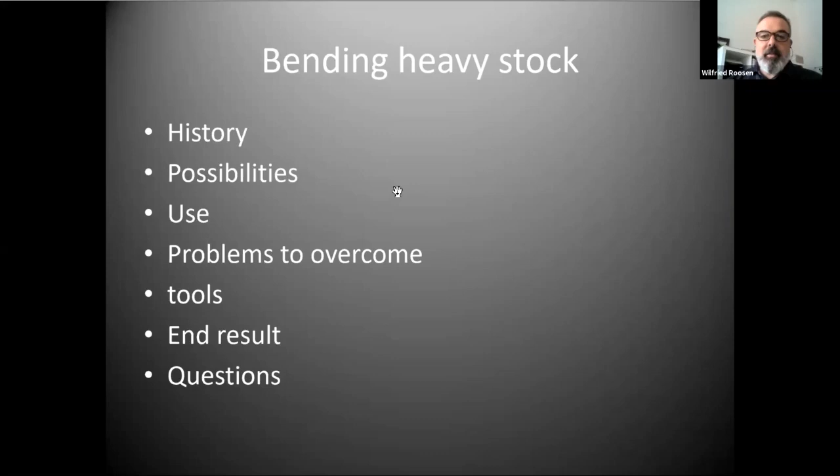So when we start at the history, what was the thing? I got a customer of mine, and he asked me to create a gate. He had seen it on the internet from a colleague blacksmith, and the picture here is the gate I made. But if you have the books of metal art, you will know there is a colleague of us who made this gate.

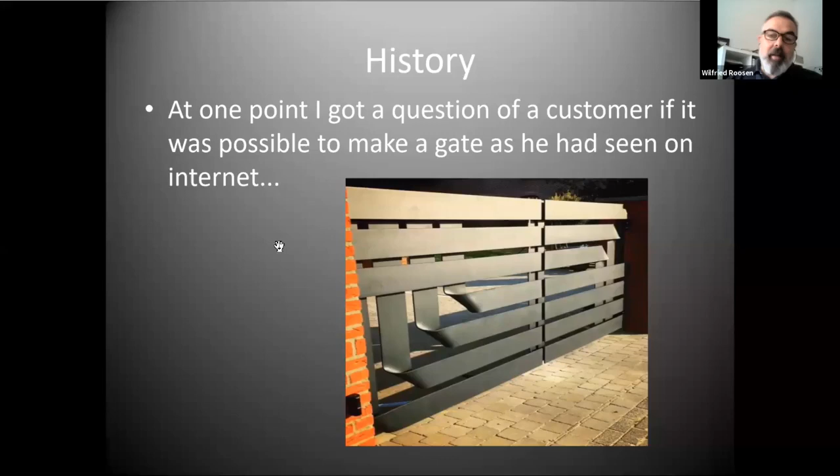So I thought, okay, good, I'll give him a call because I think it's the proper way. I asked him if it was okay for me to create a similar gate. Since we are like 900 kilometers from each other, he said it's okay, try to put your thing in it. So I got the okay to make it.

That was somehow awkward for me already, to ask a colleague if I could go a little bit his way. Then I thought, now I'm not going to ask how he made it - that was a little bit of a bridge too far. So I said, okay, that's the thing we will do here.

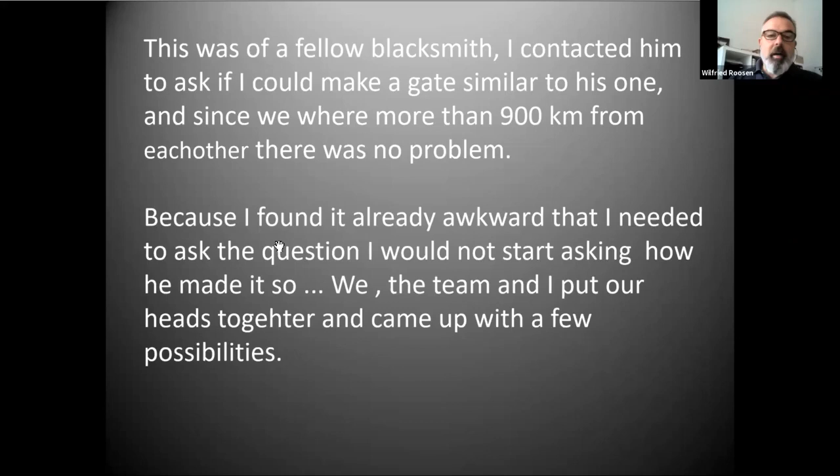We met the team and we talked together, we saw what the possibilities were and where our problems would be during the process of making. The first thing we needed to make was the bending of stock from 200 by 10 millimeters and plus minus 4,000 millimeters long - so 20 centimeters by 1 centimeter and 4 meters long.

Later on, I got a commission for a city here to make an artwork, and that was even bigger. It was bending of 400 millimeters wide by 10 millimeters thick, and the length was plus minus 2.6 meters high. So I needed to find a way to bend both those stocks, and it was necessary to bend at least 10 millimeters thick and up to a width of 400 millimeters.

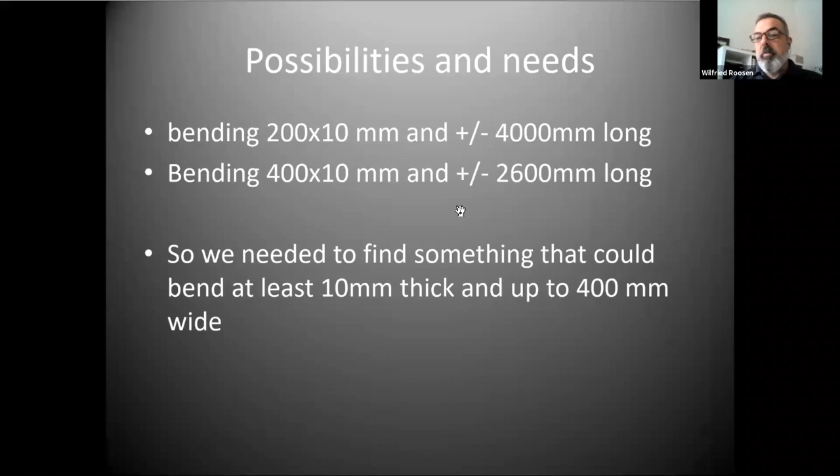Afterwards, you see you can use it to build stairs. Now I got a commission in a nearby city where we needed to build 4 stairs, and I will use the same technique to build the stairs. We made the handrails, we made the gate fences, and then we made art. As a matter of fact, you can use it for everything, as your mind, when you put your mind into it.

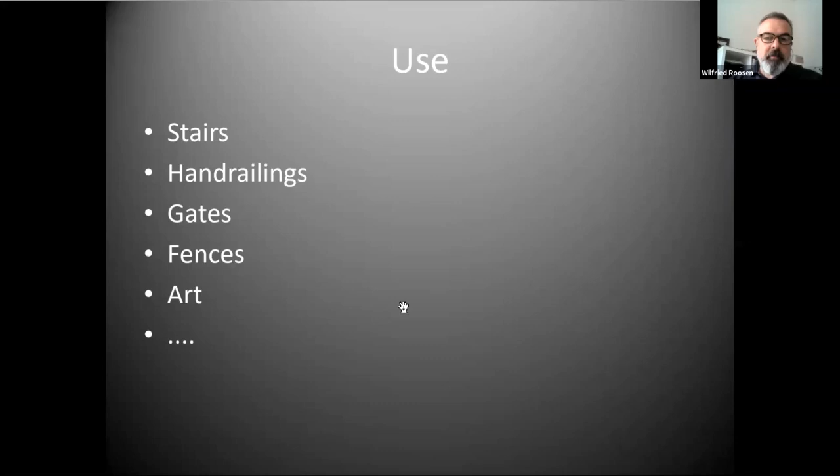So what were the problems that we needed to overcome? At first, it's the thickness of the material - 1 centimeter or 10 millimeters thick. It's the wideness of the material, at least 200 millimeters. It was the length of the material, and because of all those three above, it's of course the weight of the material became also a little problem.

Because we needed to go from the fire onto the tool we made. And then by bending it, since you made more than one piece, you should have equal bends on every piece. You will see, like when we created the gate, the angles or the square bends needed to be exactly the same as well, so in angle as in thickness. So that was important also.

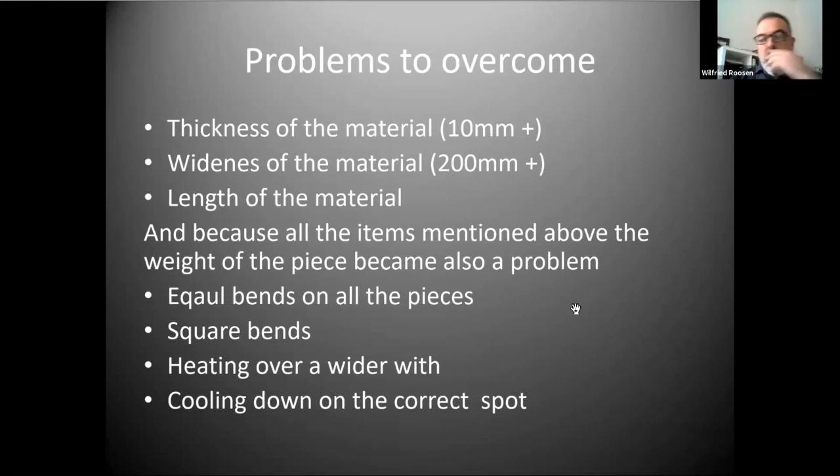Then heating over the wider width - so for 200 millimeters, it's okay, but for 400 millimeters, it's already something in the normal fire, because we have a normal fire here. And then we learned during the process that actually the cooling down on the correct spot is really important. So these were a bit the problems we wanted to overcome before we made it.

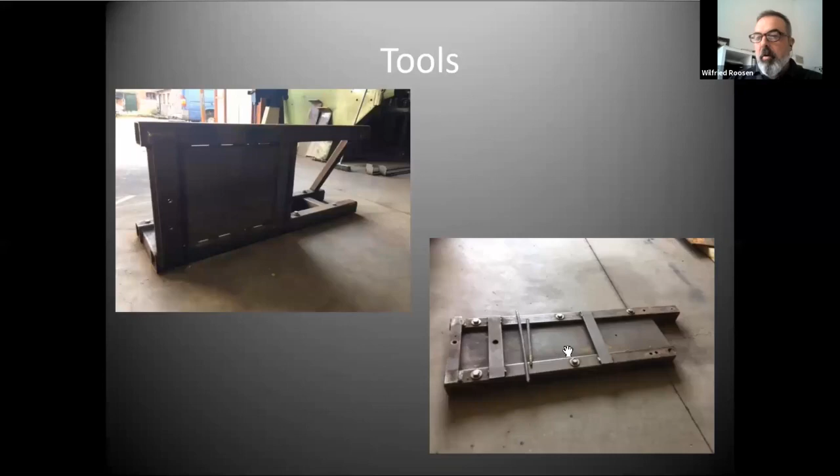So we made two tools - you see a vertical one here and a horizontal one here, which are both connected with the ground, with the floor of our forge, so we can use the power of the floor of our forge. The first thing we made was bending in a straight line the 200 by 10 millimeter stock. So therefore we created this tool, the same as for bending in an angle, which you will see later.

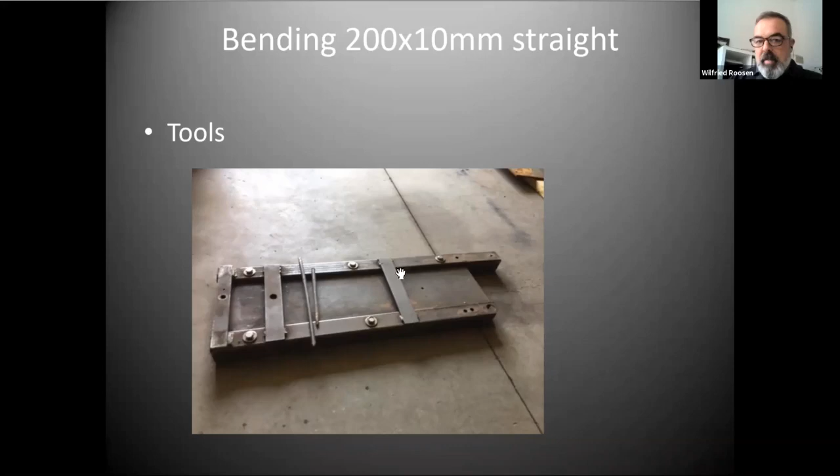So actually the plate here in the middle is the stock of 200 by 10, and we made it in such a way that you can put another stock inside it. It will go inside, so it comes out of the fire and it goes inside of here. This is how we bent it.

Normally this piece will be straight. It goes in, comes from the fire straight in here, we fix it here, and then we bend it upwards. Once you've started bending, there are two or three important things: that the material stays in place, that the bend is straight so you get a 90-degree angle, and that the angle stays at 90 degrees on all sides. That was a bit of the problem we faced when we bended the material.

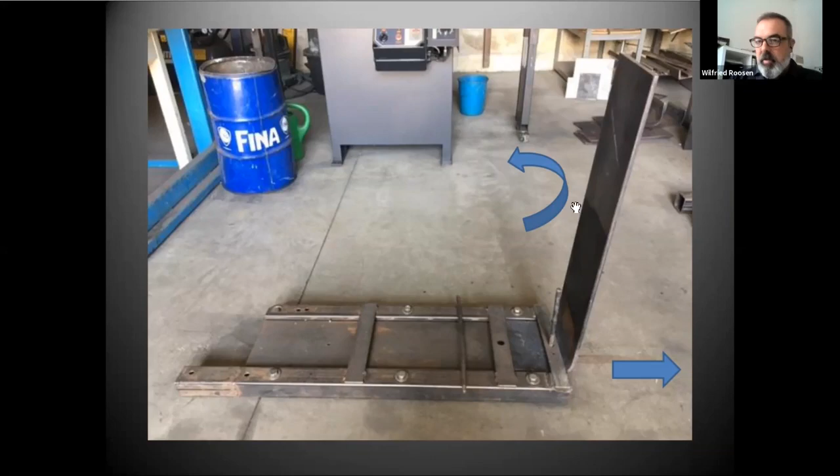So what did we do? Patrick suggested, and he was right, why didn't you make a stop so you didn't need to calculate every time how deep you needed to put the material in there? But I asked myself, okay, why didn't we do a normal stop, and why did we fix it in the hole instead?

That's because the first time when we bended it and put the iron inside, it came a little bit back out of the tool. So then we decided, okay, no, we will put it in there.

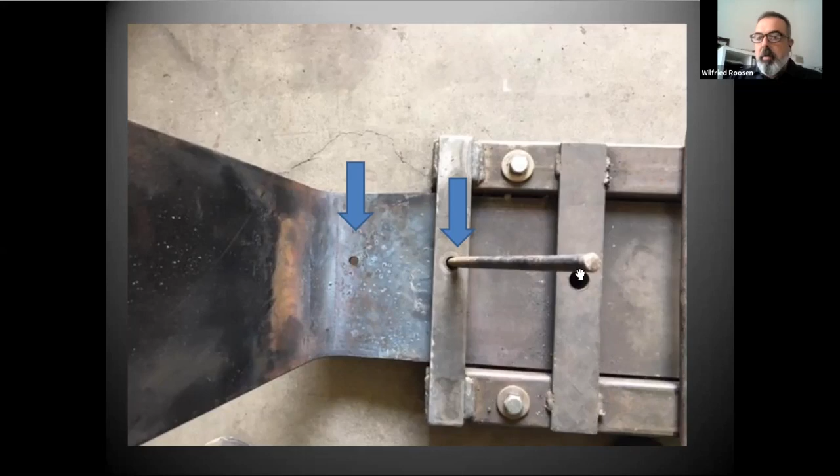We do the measuring, we drill the hole, and in a normal situation this piece of steel goes in this hole, and the stock will stay in place, and then you will bend it upwards.

For bending it upwards, we created this so it will bend at a straight angle throughout the total width, because you don't want to give it the wrong angle while bending. So we created this tool which will slide over the stock, and you bring this upwards, and then the stock will bend also upwards.

So that's the thing - important is the cooling down of your stock. This part, on the right side of the first angle, the first arrow, will go into the device, so that's no problem, that can be hot, it's no problem.

The part on the left side is the thing to watch. When you bend smaller stock, if it's too hot until here, it won't bend right where you want it to, but it will also bend here, and you won't have the right corner, of course. So that's a little bit about bending in a straight angle.

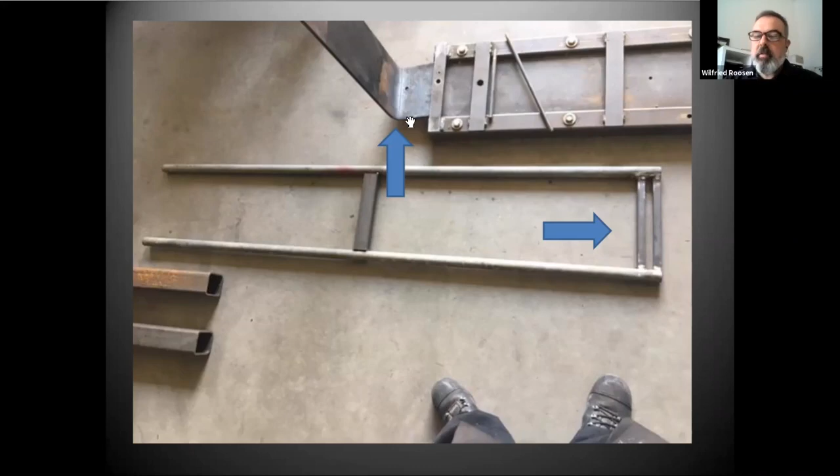That's what we use now together with the gate to make a fence. The stocks are in the paint shop right now, so I can't show you at this moment, but I will show you the end result later, and I'll send a picture to Patrick.

So then we moved on to bending the 200 by 10 millimeters at an angle. We started from our initial device or tool, and we needed to bend it at an angle of 45 degrees, plus the height needed to be the same every time.

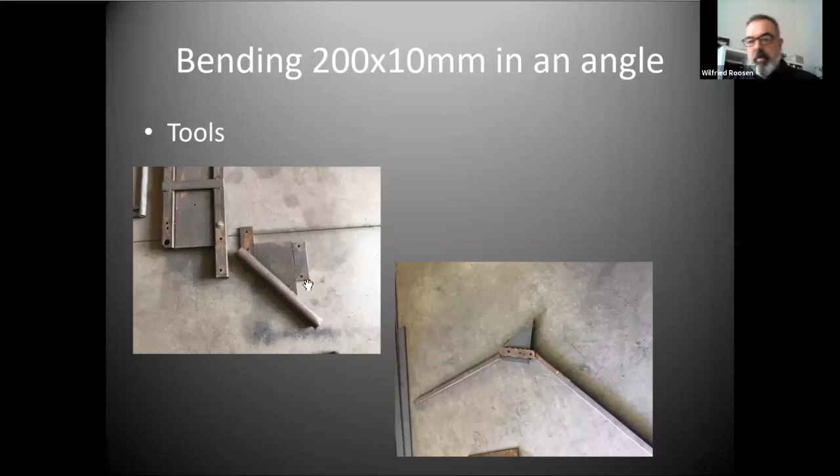In between the two stocks, when you bend them, you need to have a certain height. So we took a bar of 6 centimeters, 60 millimeters high, so that we always had a bend of 6 centimeters. So what we did was - I'm speaking here about these bends.

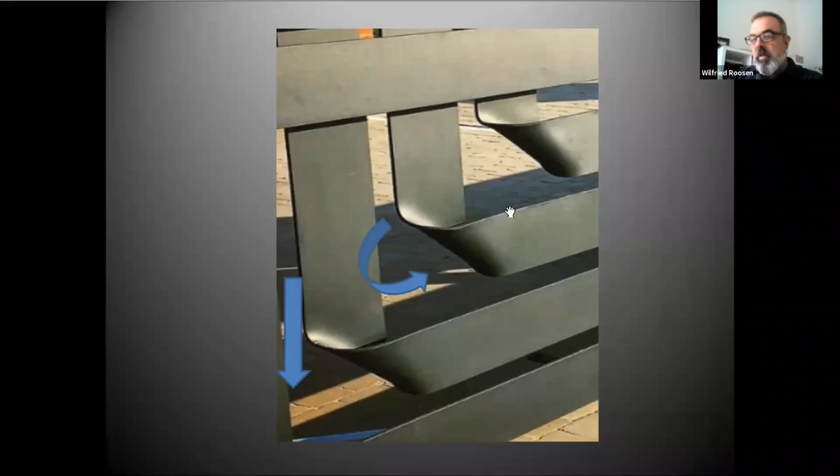You see the stock normally goes straight down, so you don't just need to bend it 90 degrees upwards, but you also need to put it at 45 degrees in an angle. The space here needed to be the same as on the other stocks. So that was a bit of the challenge we had.

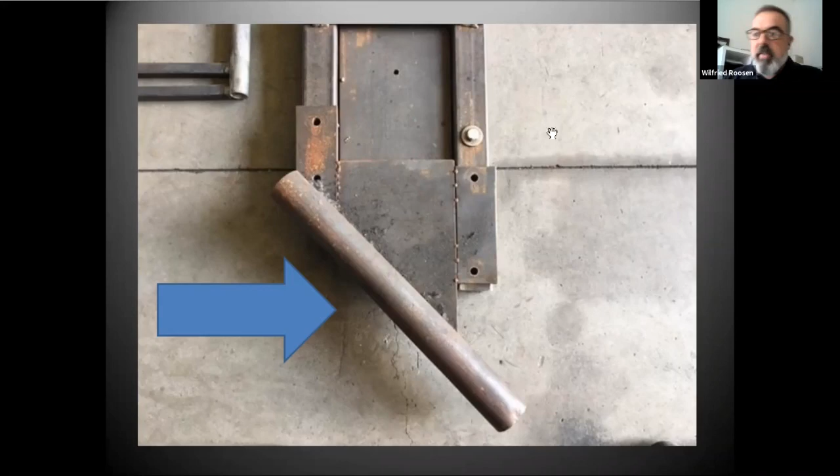So what did we do? We created this piece that we put on the initial device. The stock will slide underneath, and then you bend it upwards and to the right, and on the other side to the left. So you see here, this will be the space.

So what did we do? We took the thickness of the stock plus 3 millimeters, because when it comes out of the forge it's a little bit thicker, so it needs to go smoothly into the device.

Plus, because it was 2 meters plus or minus on each side, you already have the stock bending as it comes out of the fire. So this needs to go quickly - you don't have like 3 minutes to bend it and straighten it, because once it's bent, you needed to control if the angle was 45 degrees and 6 centimeters high.

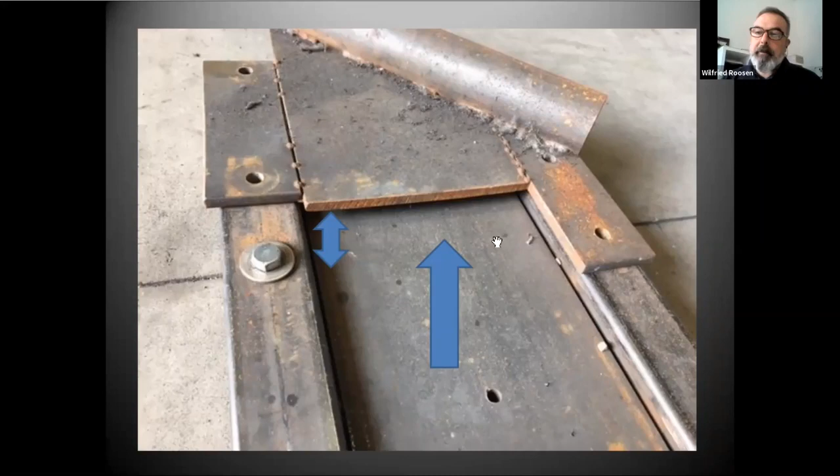So here you see, I took a little piece that we had, so it goes in here, and we bend it straight over this steel bar of 60 millimeters, so that we always have the same thing. Now, to do this bend, you want to have a clean bend here.

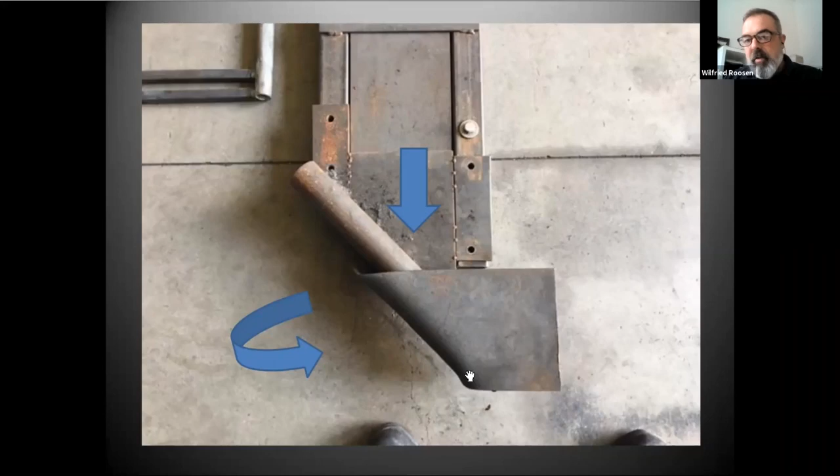When you do it by hand, the bend is never clean. So what did we do? We made this device like a guillotine, which has the 45 degree angle, and it goes over the device, and then with 2 guys you bend it and you turn it. This will be the bend here, and it will be controlled over the full length of your stock.

Here you see again the hole which lets the stock stay in its proper space. So here you see, this is the device we put on it, and this is then the end result of bending the stock.

So for the gate, you must know this goes like 2 meters wider on the right side, and this goes like 2 meters up. So that was a little bit the thing.

Then we got another commission from the city, and there we needed to bend 400 millimeters on 10 millimeters thickness, not 400 on 100. But we needed to make a chair, so this was bending left and bending right. So you couldn't make it on a horizontal tool like we used for the gate or for the fence.

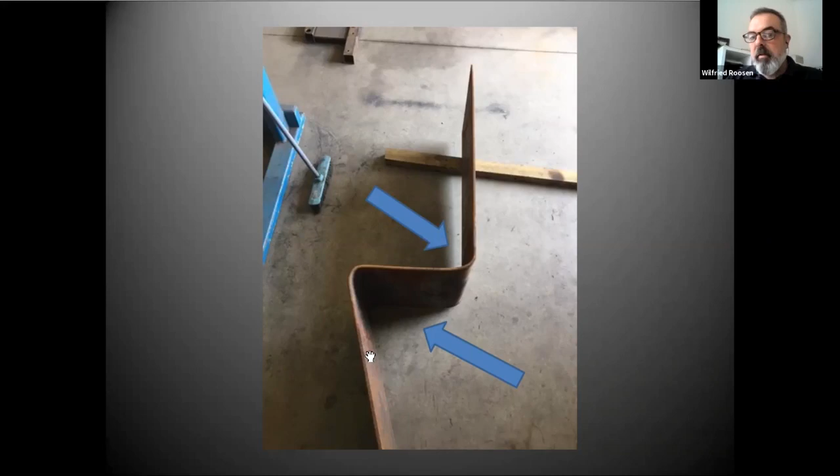So we said, okay, we're gonna use plus minus the same, but we will put it on a vertical stand. You can see here we got this bend, and then we get more than 45 degrees, of course bent, or 90 degrees bent down. Now when you put it on a horizontal tool like the one we started with, this will give a problem because you cannot bend this one. So we said, because you need to control it as well, we will bring it vertical, then we can control it.

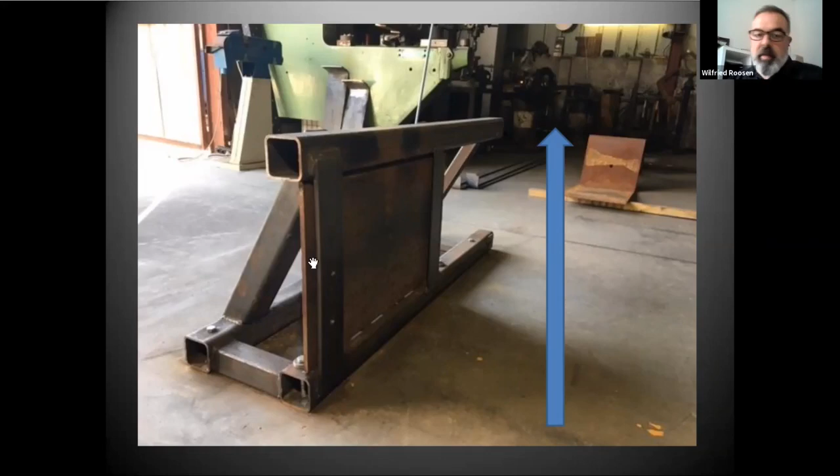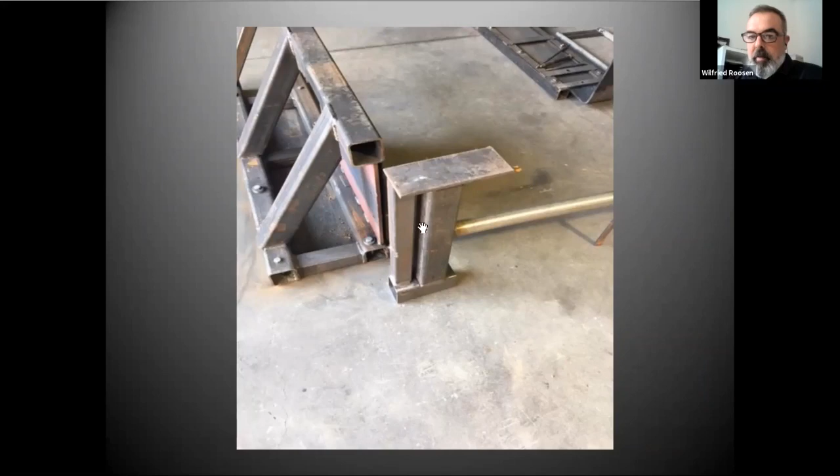So how do we do it then? This got the full length, it's got the same thickness as the material plus 3 or 4 millimeters, and we made this device as well. Why? The plate goes in here. We can control the bending because of this thing here.

Because when you try to bend it and you go up or down here, your bend will not be correct, so you won't have your correct angle at the end. So we needed to have something which stayed on the same level to start from. So we need to have this.

You see, this is 10 centimeters from the floor, so we needed to have at the end the same 10 centimeters from the floor. If not, this would go a little bit not straight again. So we made this device here, and here you get the measuring horizontal on the floor, and we go and we make the bend like that. So this is here the end result in bending.

So these were a little bit the problems during the stage that we faced. That was first of all bending over the full length, and then having a nice bend on the two articles. So normally here comes the other one, and he goes here and he stands like this.

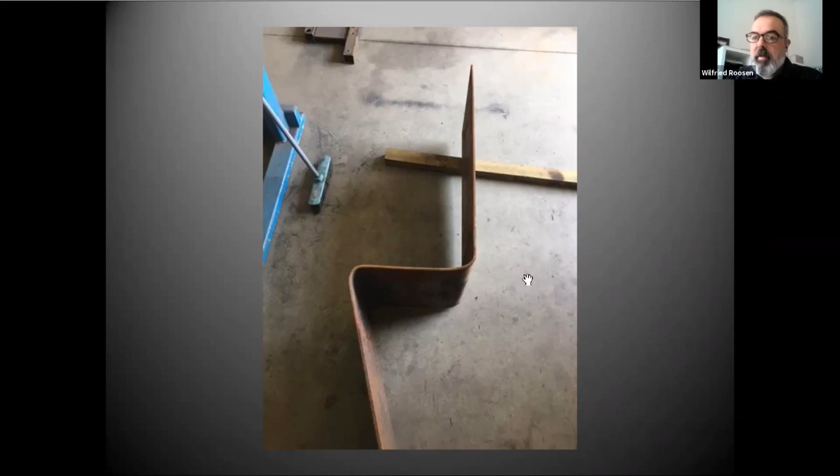It's a chair, which I will send a picture of because the community is placing them next week. So I don't have it anymore, but when it's ready, I will put a picture as well. Okay, so these are a little bit the end results.

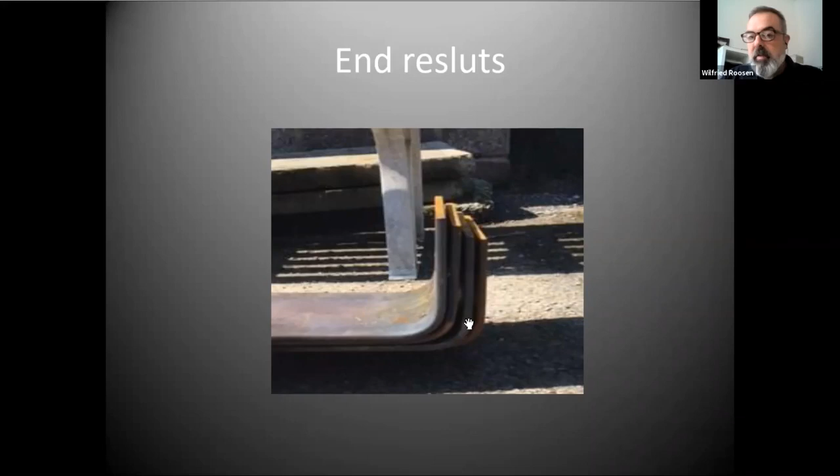So this is the bending of the material, of the straight material, and you see this was used, we made the fence out of this. This is one part of the chair, so the other chair is coming on the back end of it. This is the gate and the smaller door.

So you see we needed to make 1, 2, 3. Here you got 4, and here another 3. So we needed to make 10 bends who are equal. That was a little bit difficult.

That's another one. And then we had a commission in Hasselt, in a bigger city, and there we needed to make hand railings, so I actually used the same technique. Also here is the bending of the stock, the normal bend, and then when you see upstairs, we took this 45 degrees and we went down. So here you see it.

So we bend 45 degrees, and then we go down with the angle of the stairs. And here's the same, you got 90 degrees, and it goes like, I don't know, 30 meters or something straight on. So it's all not the traditional way of forging, but yeah, we try to take forging with us to build a new gate or a new handrail here, so that the people...

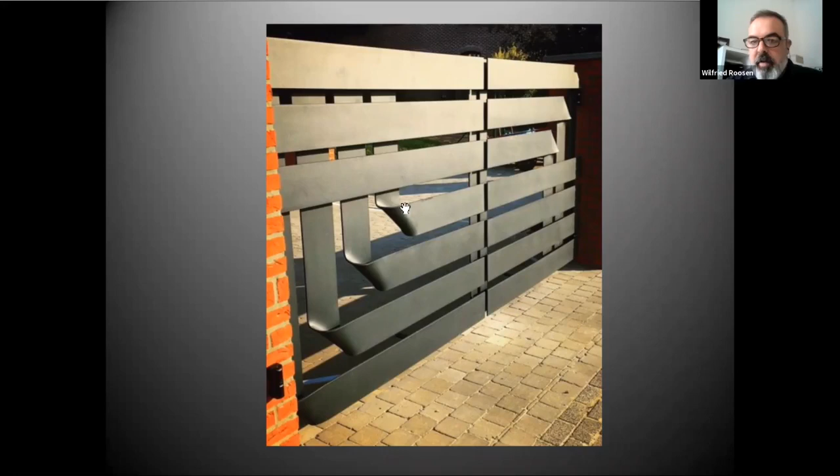Here you almost don't see it. So Robin means that the bend here, on both outsides, would go a little bit out, would not be straight, or there's some kind of curve. Yeah, so therefore we created this device.

You put it in there, and this is the full width of the piece. So this goes over it, and the piece goes inside it, and it was bent from here till there. It's like the lever tool - you put this in there and it will bend over the full length, and it will take the full length of the stock without bending unevenly.

These are also examples. We tried a few before making the gate, because it wasn't that we put one piece in the fire and there was a gate - we were trying 2, 3 before we had the right solution for us.

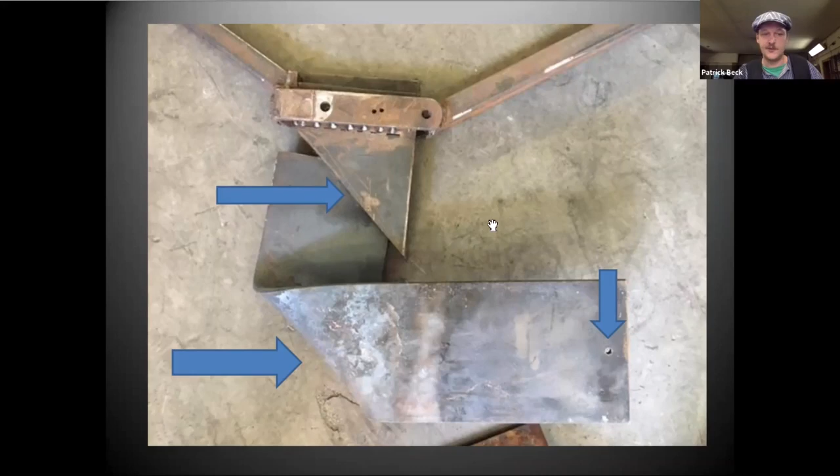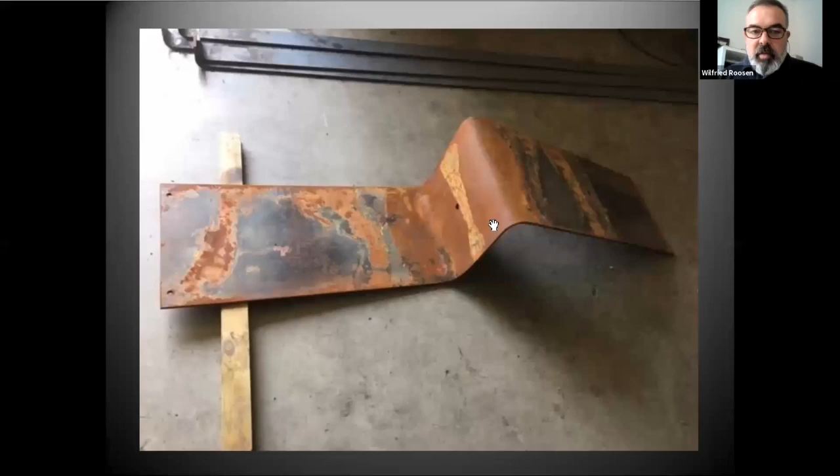Yeah, the gate. I tried to show you - I go, I tried to show you. This gate is only put together on the back side. It's not that we didn't make it properly.

I think the question was more in that direction, Wilfried - that the design as such and the width invites other uses than as a handrail, young people for example could use it for skating. Is it structurally safe enough for that kind of purpose?

In Hasselt, we noticed when we went back for the control, to see if everything was still okay, that they used the handrail for skating. But here you see, that's why I come here - this is not made with a frame. So this gate is actually 1, 2, 3, 4, 5, 6, 7 pieces of its own.

The only thing we did was we needed to put spacers at the back side, so every piece is only held together with bolts. It's not that this is made on a frame - the same here, you see, this is not a frame.

There's no frame, so the plates are exactly the frame. So this won't bend.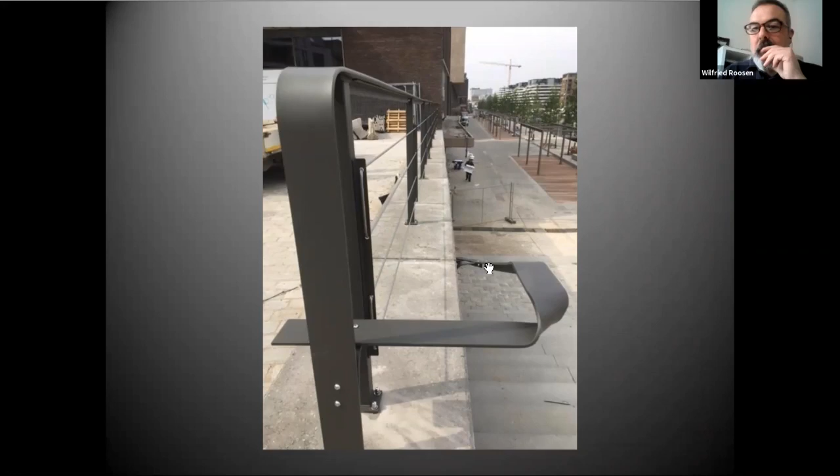In the corner of the armrest, I don't need the T-bar because the corner as such is stable enough, but the stiffness is needed over the long ways. It's stiff enough as such. You can see in the gate, which Wilfried earlier showed.

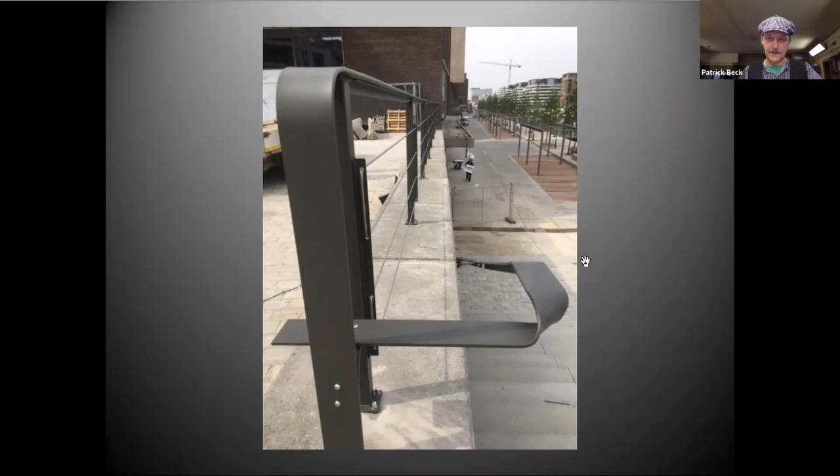Lars Jansen is asking, how long did it take you to work out these solutions? Die Frage ist, wie lange hast du gebraucht, um diese Lösung zu erarbeiten?

Wahrscheinlich auch, how many trials, and probably also how many trials. It was really, wahrscheinlich auch wie viele Versuche benötigt. It was trial and error.

So the straight bending was of course not the problem. The problem was when we started bending it at the angle, and the first time we bent it without the device there - I forget the lever, or how do you call it, Patrick? Then you saw that the angle wasn't correct, or the thickness wasn't correct.

So we knew we needed a device that controls the bending. We came up with what we made, and then it was okay - you could control the bending from each side to the other, and it worked. How many times? I don't know. It took us half a day or something before we put everything together and found a solution.